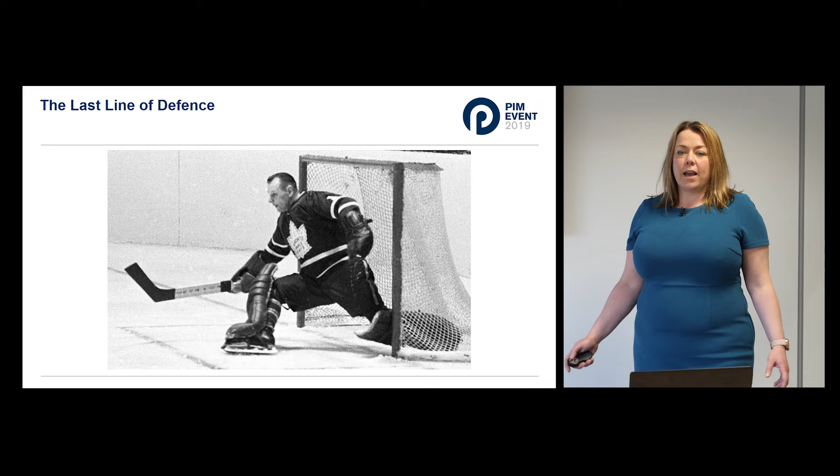So our PSVs, much like our ice hockey goalkeepers, need to be set up for success, unlike this poor guy.

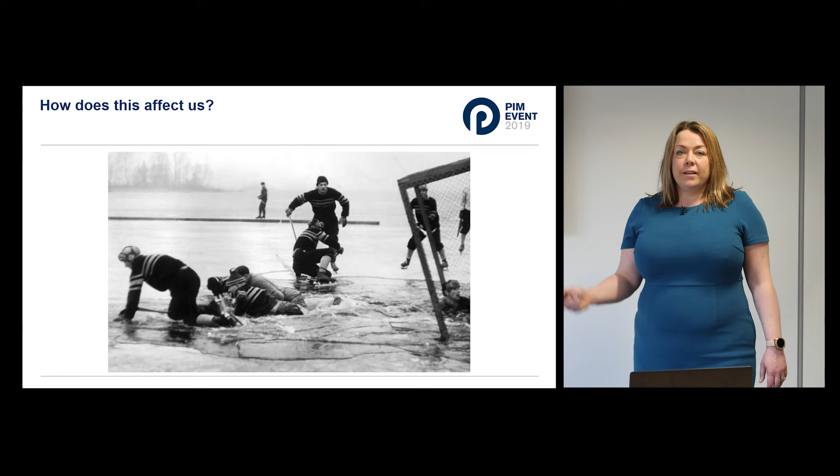I'm going to move on and just speak briefly about the pressure system safety regulations, covering the safe design and use of pressure systems. Now, whilst these apply onshore, they're often used as examples of good practice for us offshore.

First of all, we have safe operating limits. This is defining our IOWs. We have our written schemes of examination, telling us the frequency, type, and nature of examination that we're going to do. We have the examination in accordance with the written scheme. This also includes the preparation for inspection and also reporting and considering items as fit for continued service.

We have action in case of imminent danger, so our response to anything on the plant that would cause us imminent danger.

We've got operations, which covers both operation procedures during normal operations and an emergency. We have maintenance, keeping our items of equipment in good order for use. The keeping of records, this includes things like the design basis, our P&IDs, and our inspection records, as well as the precautions to prevent overpressurization.

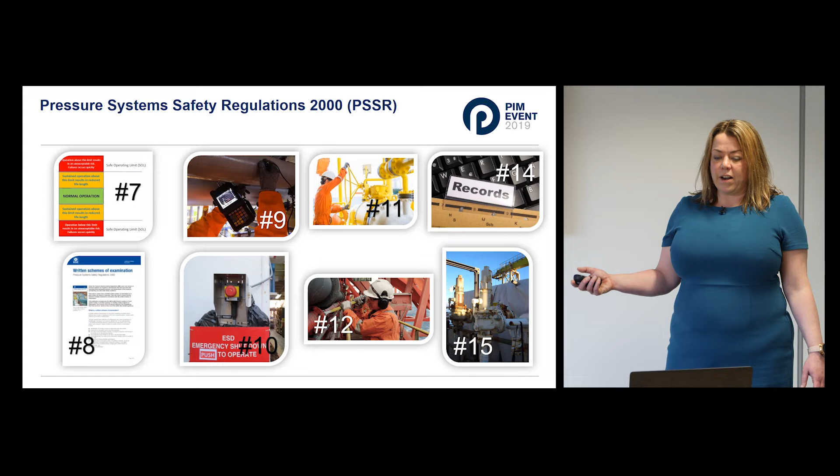Now, when we think about PSVs, every plant item which can exceed its safe operating limit needs to be protected by at least one pressure relieving device. That needs to be suitable for the intended duty of that vessel, and also as close as practicable to the piece of equipment that it's designed to protect.

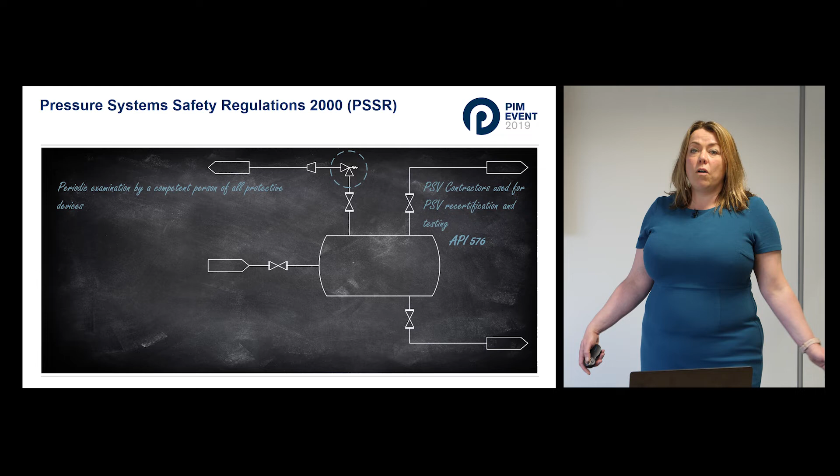They require periodic examination by a competent person, and that is typically done in the offshore environment by PSV contractors, often removing PSVs and sending them back onshore for testing and recertification during shutdown periods.

But for our inspectors, considering the inspection of the vessel, at the end of the examination, they need to be satisfied that the protective devices are set correctly and operating correctly. And if we go to the likes of API 510, for the inspection of pressure vessels, the pressure relieving devices should be inspected at intervals that are suitable to verify that devices perform reliably in their particular service conditions.

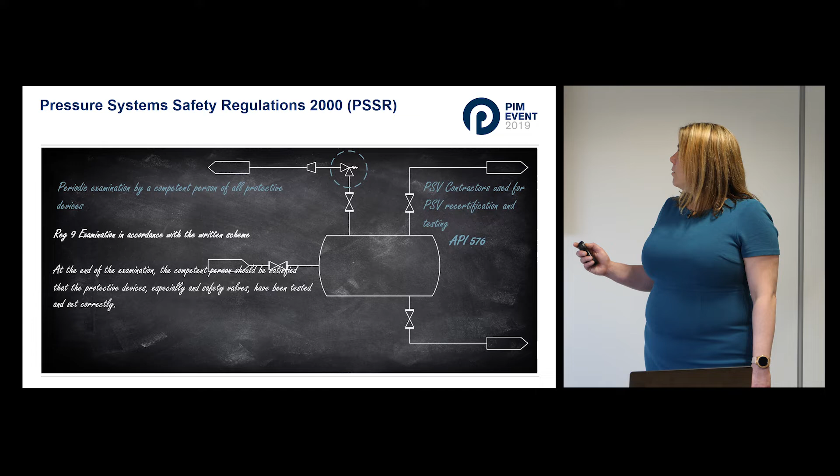So what does the testing and recertification look like? Here we've got the test rig. When the PSV comes to be tested, it's tested at the cold differential test pressure. This is the pressure that's modified for the service conditions of back pressure or temperature versus the set pressure in service. They'll pre-pop test this unless it's particularly fouled or dirty, in which case they would need to increase their inspection frequency. They'll test this up to 90% of the cold differential test pressure.

If it fails before then, this is considered a soft failure, meaning this is a pressure relieving device that would have relieved too soon. They'll continue up then to 110% of the cold differential test pressure, and at that point the test is usually stopped because it's considered a hard failure, as in the PSV wouldn't have lifted. It will then be stripped, inspected and maintained.

That will involve the removal of gaskets and O-rings and replacement of those. It will then be tested again and certified with its next test date and a test certificate, and it will also be leak tested to API 527.

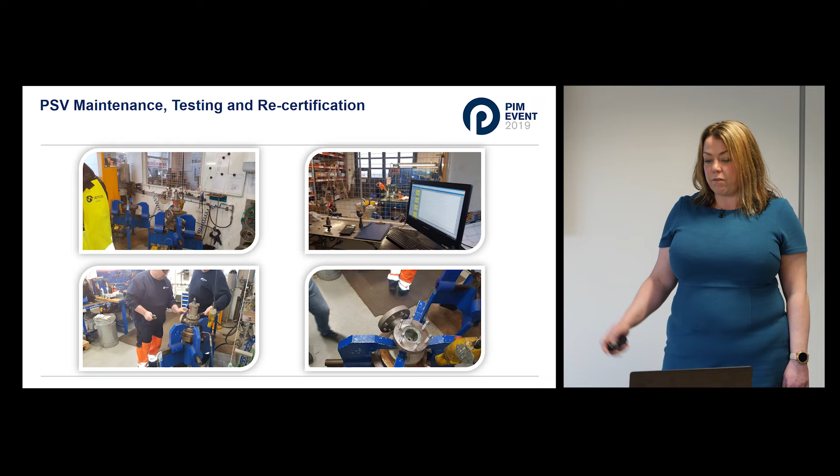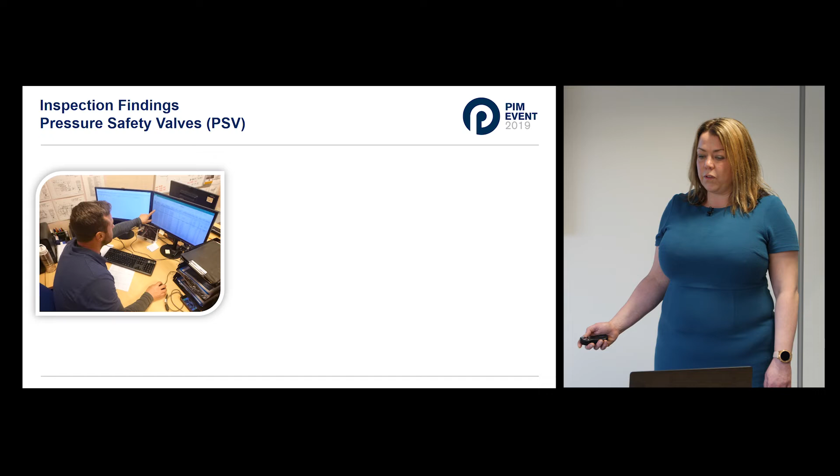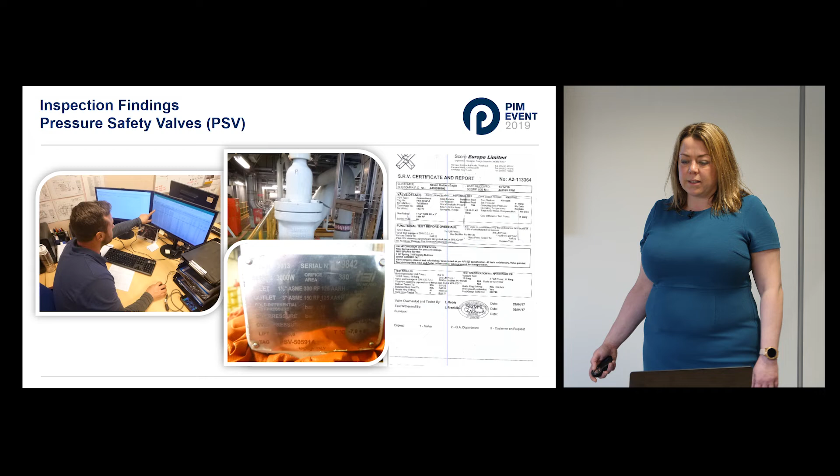So in terms of when our inspectors are going out on the plant to inspect a vessel with an associated safety valve, first of all, they're going to check the tag against the PSV register. And they're going to confirm that they've got the POP testing records, the certification dates, any findings. This could be things like corrosion, deposits or blockages that have been found in the PSV. That would go on the inspection report. And it's also good practice here to report any instances of persistent PSVs lifting in the plant.

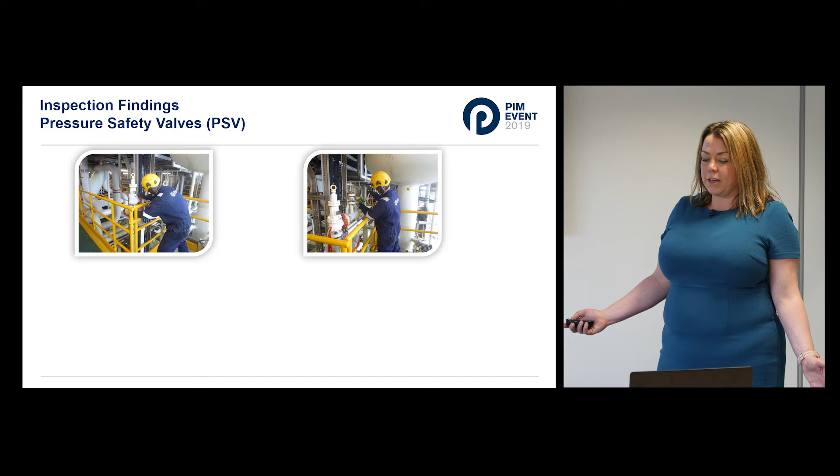We then go out onto the plant, and our inspector is going to record the external condition of the valve, checking for any damage, corroded casings, that sort of thing. They're also checking to identify if there have been any mechanical damage or modifications, anything that might restrict correct operation. And then, importantly, confirm that any upstream valves that are required to be locked open are locked open. They will also check the associated pipework and supports to make sure they're not broken or displaced.

And they do all this because they need to endorse the vessel or piping as fit for continued service. So if they have any doubt about the fitness for service of the PSV protecting it, they can't then say that the vessel or piping is fit for service.

Now, the reason I'm talking about this today is in our recent UKAS surveillance visits under our ISO 17020 accreditation, we've been asked, what do we do around PSVs? And so we've explained that we check the certification, we do the visual inspection, we record this all on our inspection reports. And then recently we were able to give our assessor an example of one of these things.

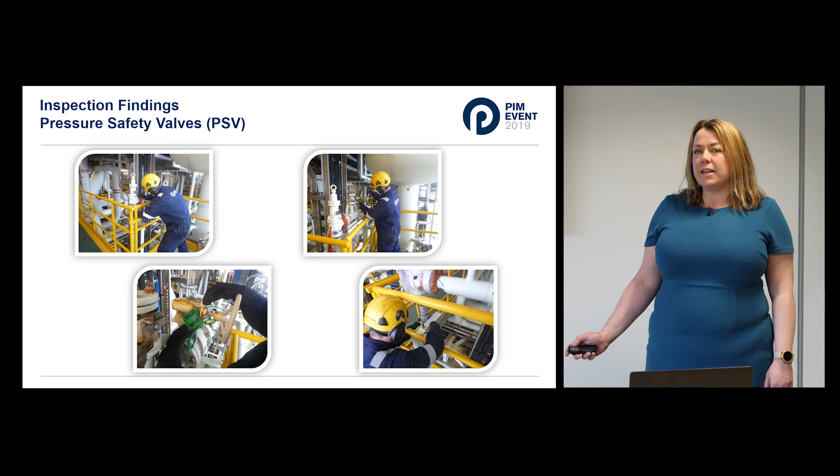So there was a PSV where the test recertification date was later than that recorded in the work management system. And so we had gone back to the operations team and asked why that was, to find out. It took them some time to come back to us. And our assessor felt that we hadn't really escalated this very well with our client.

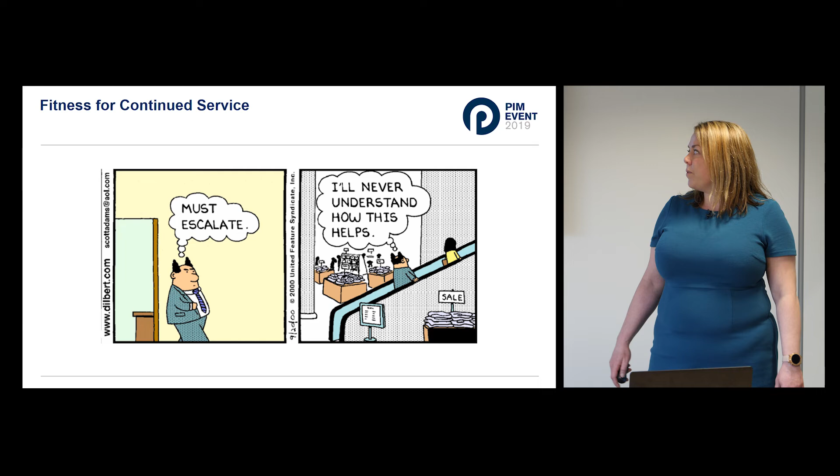So we had a little bit of a discussion internally about how we would escalate this with our client. What would be the correct way to go about this to ensure that we got a speedy and appropriate response to queries around our PSVs, which obviously are essential for safety.

So we thought about our anomaly categories, and I'm sure you'll be quite familiar with this type of thing. Under our system, the prioritisation categories, we have our yellow superficial anomalies. They don't present an immediate threat to the system, and they don't need immediate repair. We have our orange or assessable anomalies. Whilst they don't immediately present an imminent danger to the system, they will eventually, if not addressed, lead to failure. And then we have our critical anomalies, which is anything that represents imminent danger.

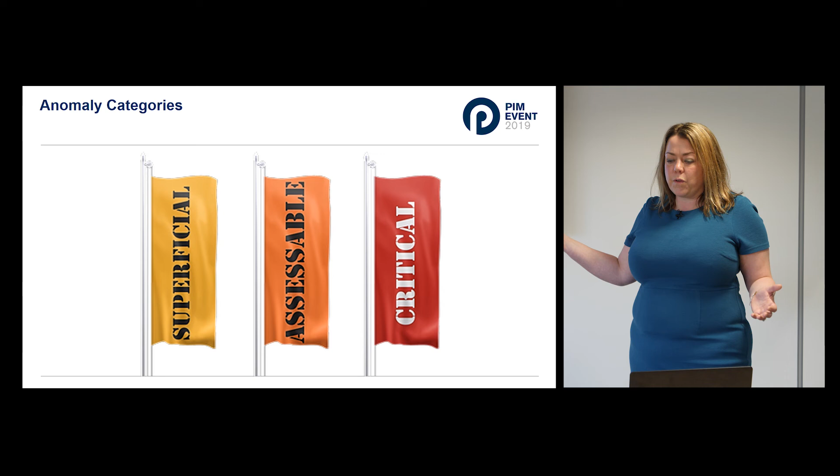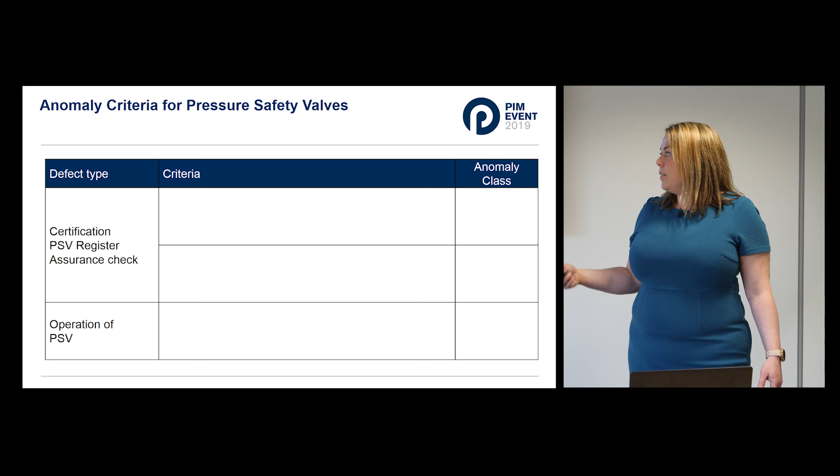So I don't know what you would think about what level of categorisation you would feel is appropriate if you had a query around a PSV's suitability. We thought about the criteria and felt they came into two categories: one is the assurance check to ensure that the testing and recertification is within date, and then also around the operation of the PSV.

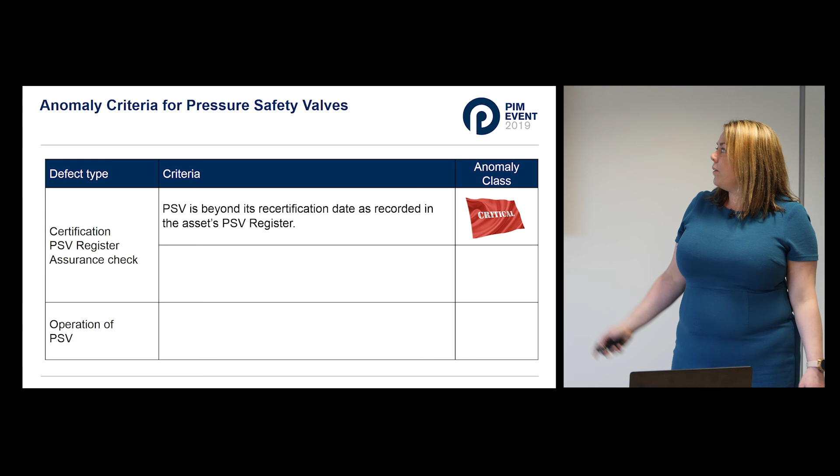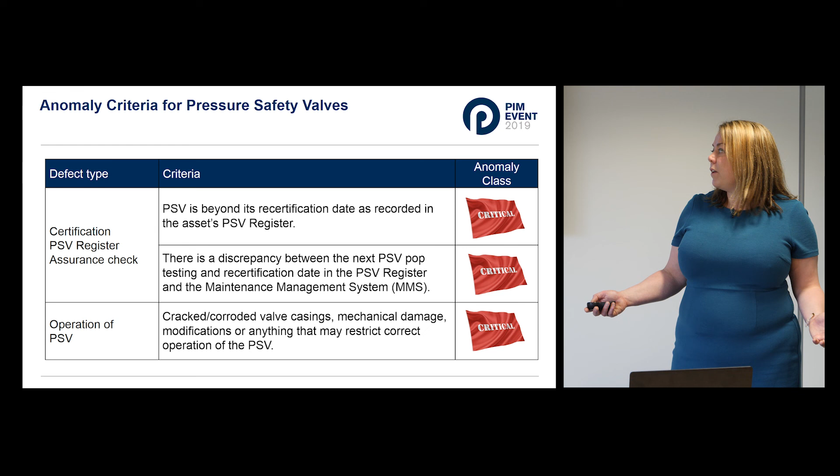So we came up with three criteria. One is that it's beyond its recertification date, and of course we felt this was a critical anomaly. Our second was a discrepancy between our maintenance management system, i.e. when the next testing was planned, and what the test certificates or PSV registers say. And then finally, the visual condition of the PSV. This was any mechanical damage, modifications, or this could be locked open valves that were closed. Again, these would be critical anomalies.

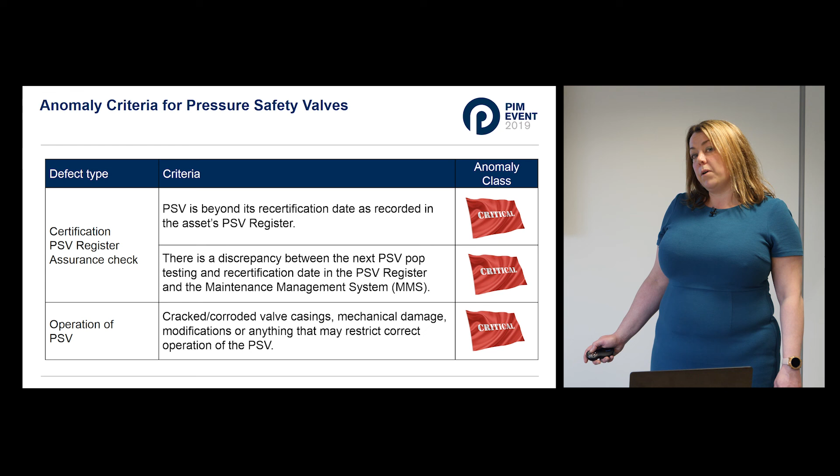And why is this important? Because endorsing a pressure vessel as fit for service, where we're not confident that the PSV can protect us from serious injury, just can't be done. Because we need our protective devices to work when they're called upon, much like our ice hockey goalkeepers, because they're the last line of defence. Thank you.